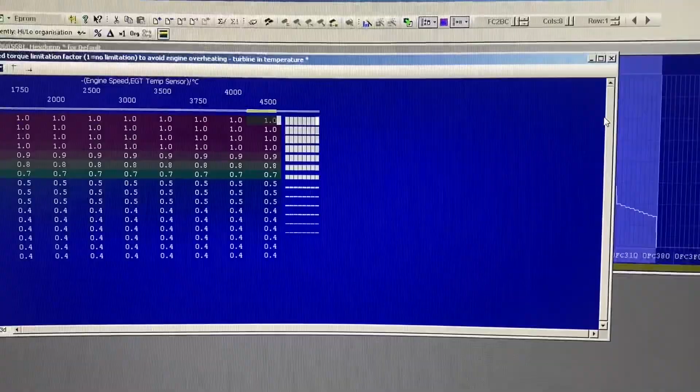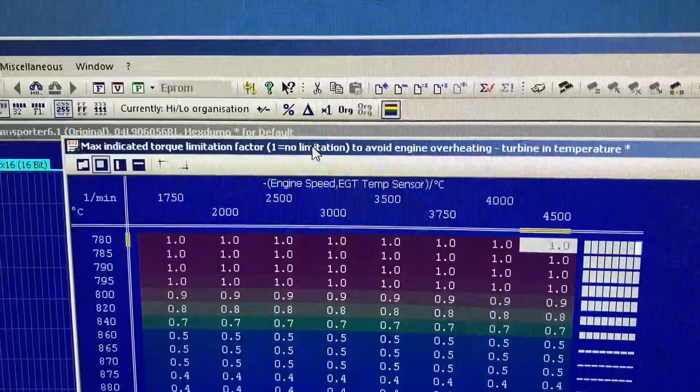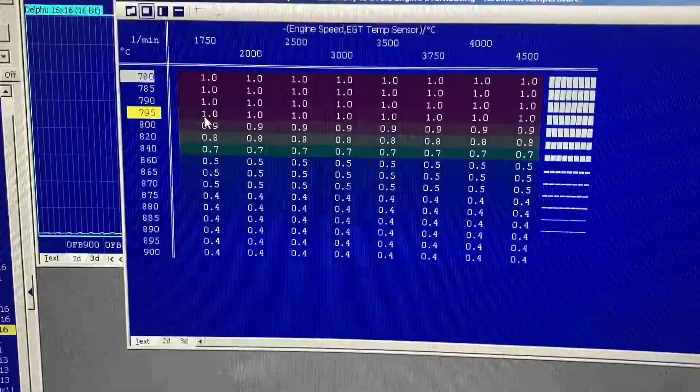So you can see here, this is the EGT map, 1 equals no limitation, and as it starts dropping down from 1, it starts limiting it. If you look down this axis, this is the EGT sensor that's pre-turbo, measuring your turbine temperature. It gets up to 795, no protection at all, gets up to 800 and it starts getting protection there. At 800, 0.9 you can see it's started getting a little bit of protection. So that's a look at the EGT one.

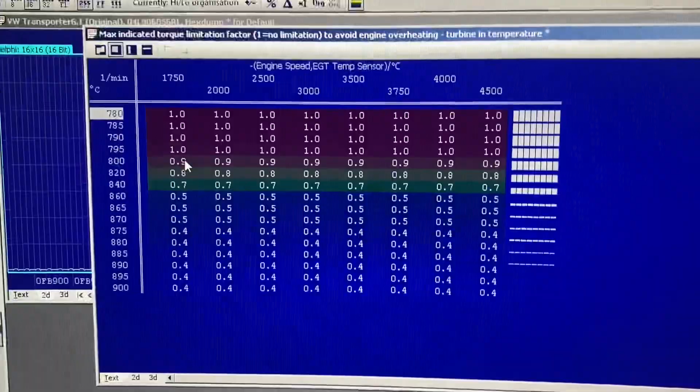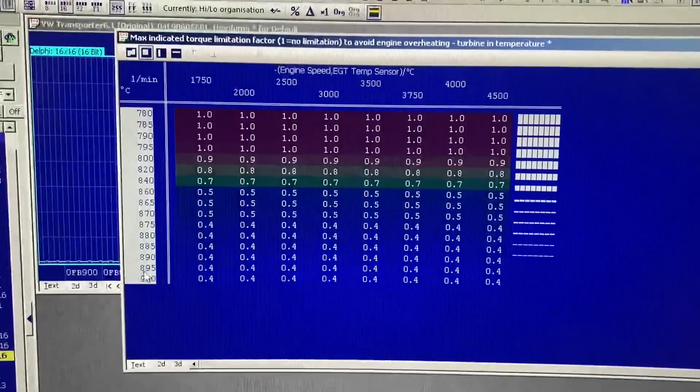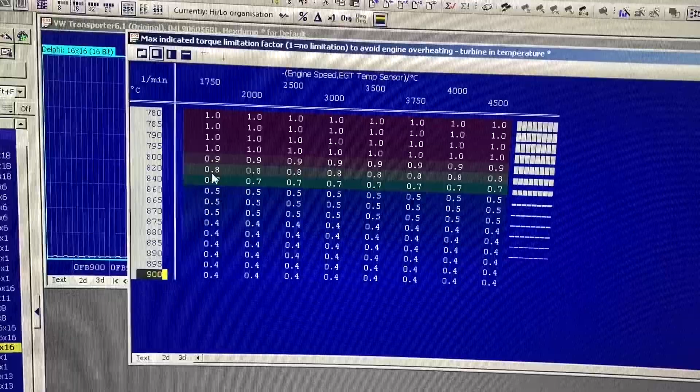We know these turbos on these will run really safe up to 890, really safe. So we can recalibrate all this axis down here to 890, then slowly drop it 890, 900, 910, 920, 930, 940, and then we'll protect it where we'll just start dropping the limitation off.

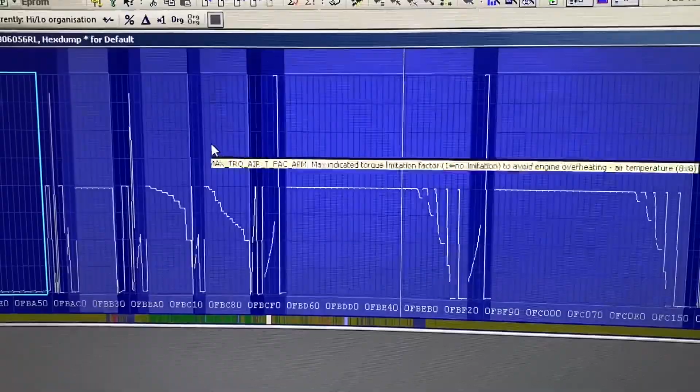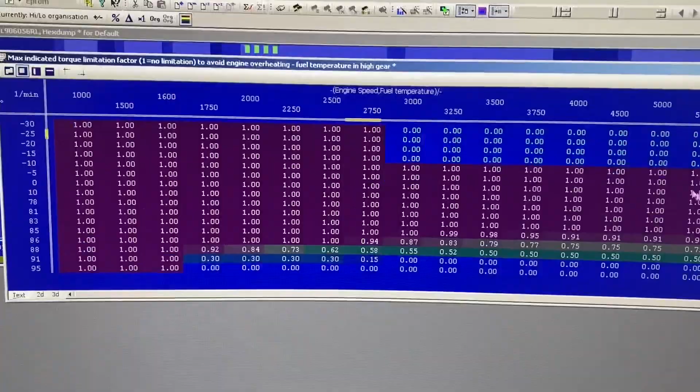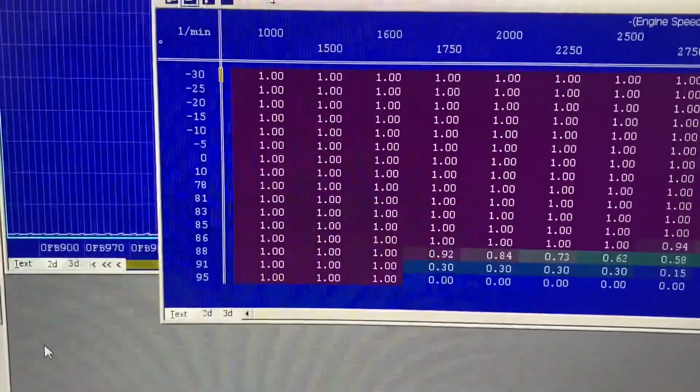Now if you live in a really cold climate, we could put protection in so you can't rev the engine until the fueling's got up to temperature. This is enabled in some software versions, depending on where the vehicles are from, but we do enable this protection when we calibrate software, even for vehicles in the UK. We do get cold temperatures, not down to -30, I don't know whether global warming is going to change that.

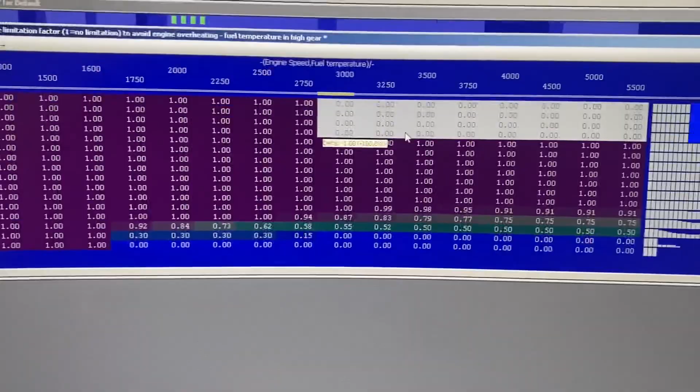But a customer from the UK might drive the vehicle to Iceland, you know, we never know where they're going. So I calibrate all the software so you can drive them all over, and I will enable the protection in our software. Like I said, a lot of people call this thermal protection enabled. We do calibrate our software to enable this protection, so you can't thrash the vehicle until it's warmed up.

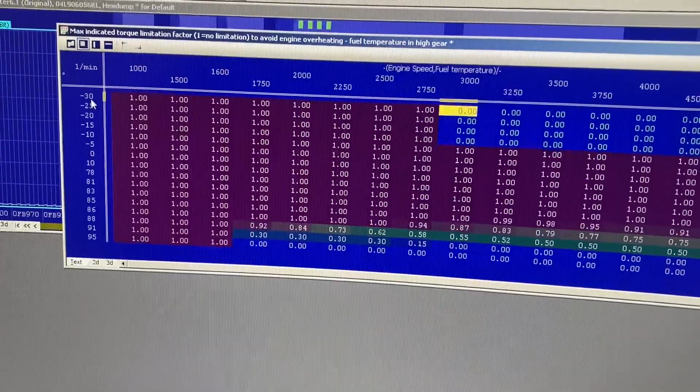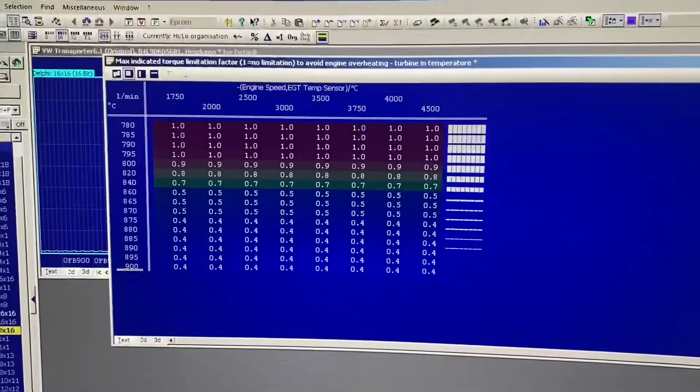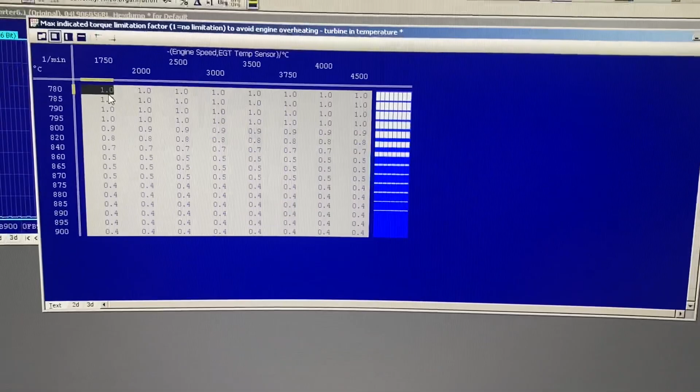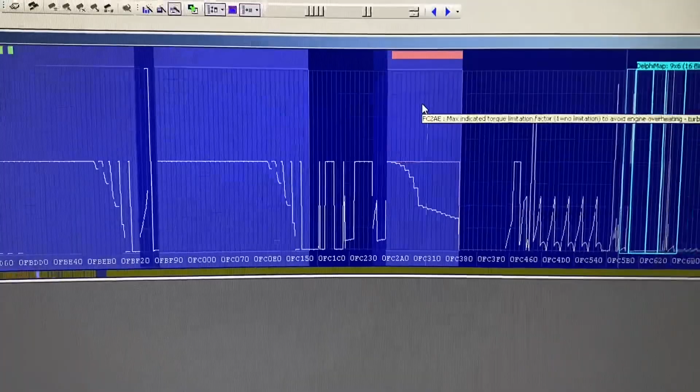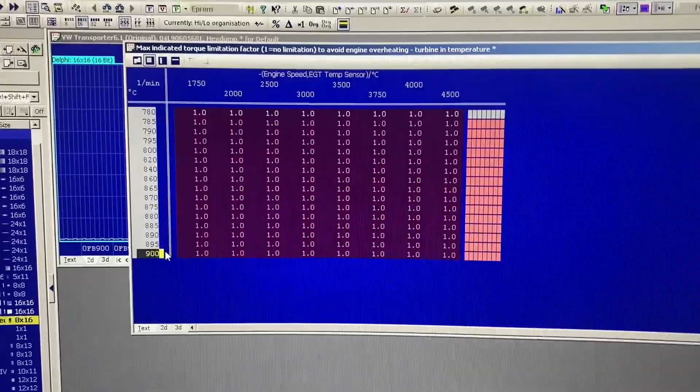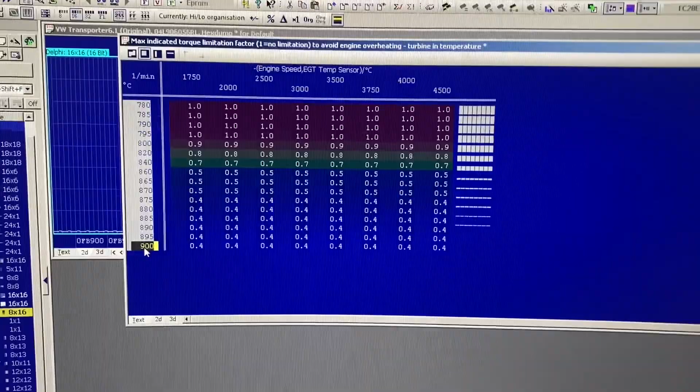So a lot of tuning companies do this, where really they should spend the time to recalibrate the axis to what temperature they will allow the turbo. These turbos on these T6s will run to 890 all day long, non-stop, no problem whatsoever. So tuning companies, you can rescale all the axis and rescale your map to enable correct protection, thermal protection.

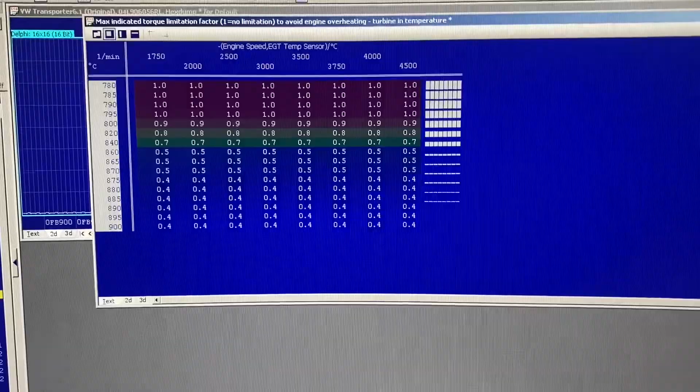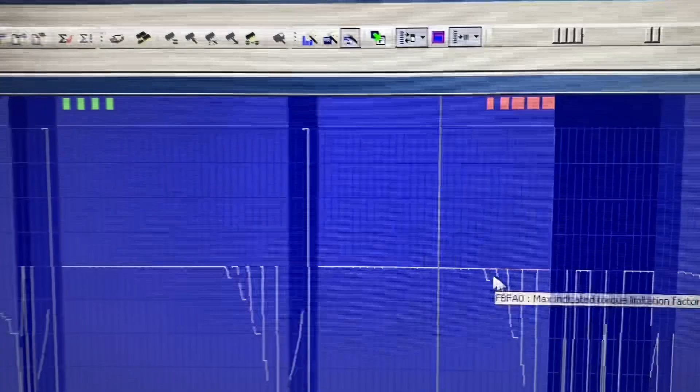A lot of people do call it that, so it looks well, I suppose, but it is OEM protection maps. We do need to keep these enabled and recalibrate them where needed, so we get the correct performance from the vehicle. They are there for a reason, not just to blank out. They are there to be calibrated properly, and we can also recalibrate them to enable protection in really cold climates. So a lot of stuff we can do.

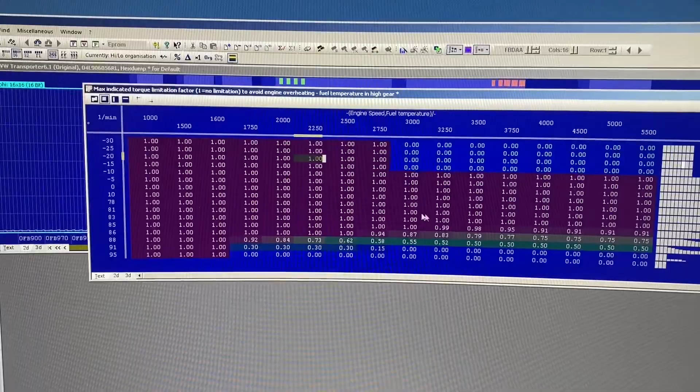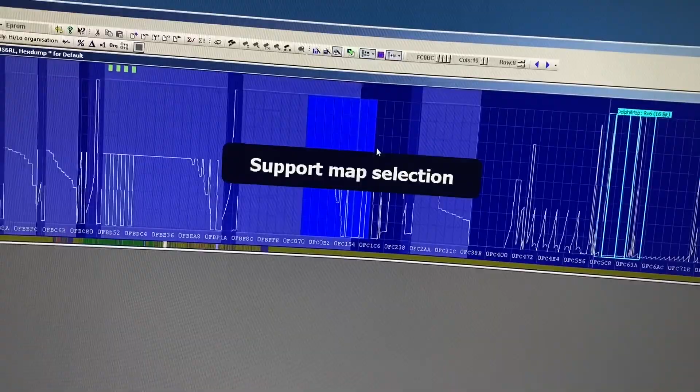I'm going to start doing more and more of these talks. It's also going to enable tuning companies to have a glimpse of what goes into it. A lot of tuning companies out there just do flash generic maps, but these video guides and talks might help some other tuning companies as well. This is not the way to do it, you should have that enabled and then recalibrate it to suit your research and development. Like I say, EGT protection, really important.